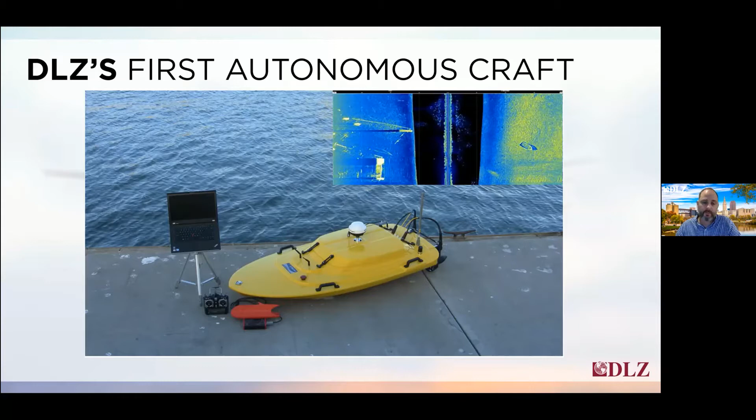So DLZ, when we first started looking in 2015 at this technology, we started looking at the capabilities, the intended use of what we would use unmanned aircraft for, the environment we would be using them, the cost, and the maintenance of the aircraft, either firmware updates or motors, batteries, this kind of thing to keep us operating drones safely.

It has the capability of swapping out different payloads, different sensors, that allows us to do aerial mapping, orthomosaics, thermal mapping, that kind of high-end detail and very accurate mapping, where the other two are quadcopters, also capable of doing 3D mapping. The difference being that the quadcopters' battery life is not as long because they're working harder.

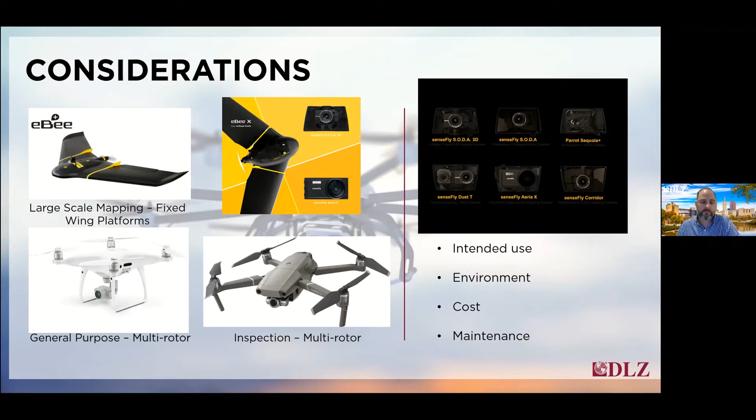The inspection multi-rotor that you see in the bottom right has the capability of zooming in. So if you have a very still day, this particular platform has a good gimbal, you're able to zoom into certain features from a far distance. So that one does have that advantage.

So DLZ has a total of 9 remote pilots that are certified by the FAA. We have 11 different drones that we're currently operating in 6 locations, and that gives us the capability to operate and cover just about all of DLZ's 27 locations and operating territories. And if for some reason we're not able to get there immediately, we do have the capability of throwing the small plane into the big plane and giving us an even more increased service territory.

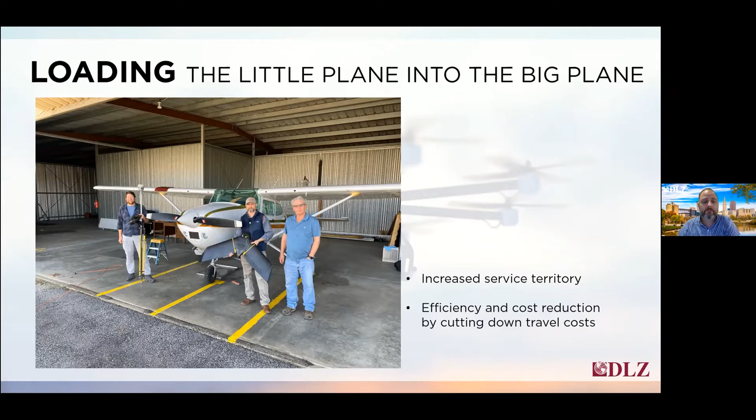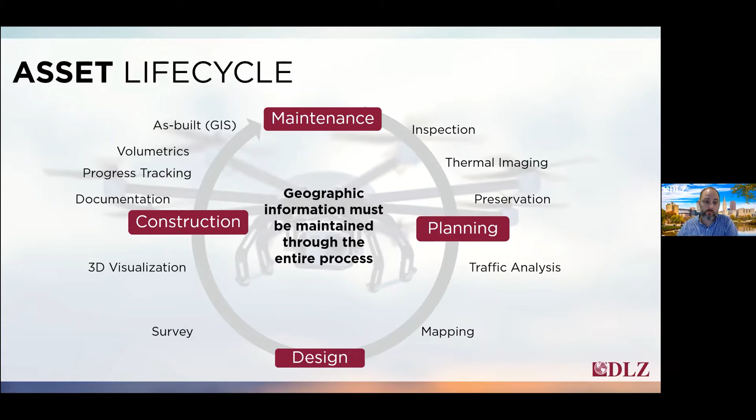So this is a really good slide that I like to share with folks to try to put in perspective from land surveying and mapping. And drones is just another tool that gets to touch this asset lifecycle.

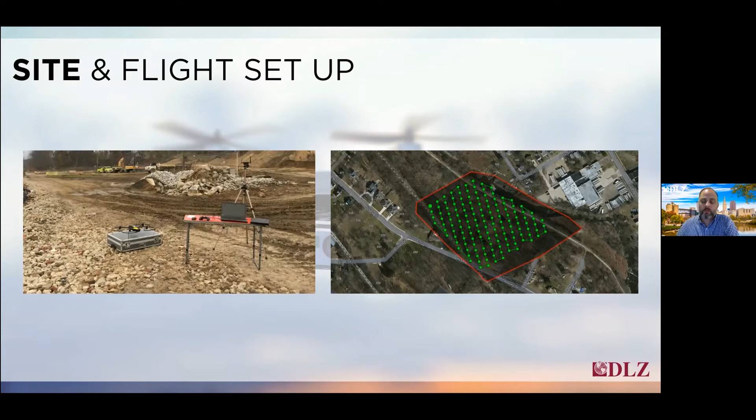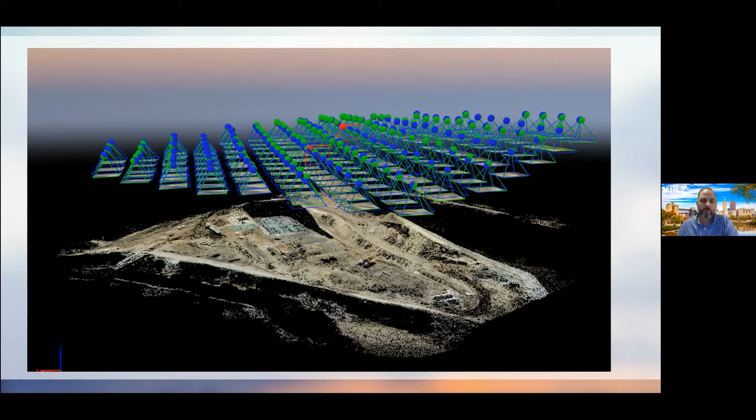The red ones that you see in this are actually points where there's bad data. Probably the drone was blown off course. So the software is sophisticated enough to understand that those particular points from those two images are not good enough for building the solution to our surface model.

So when we talk about mapping using drones, it's essentially no different than conventional aerial mapping. For folks that have used conventional aerial mapping over the years, we're basically doing the same thing with drones. The big difference is we have to fly 400 feet or less. So that means that the level of detail that we're getting is actually better in some cases compared to digital photogrammetry that you get from a helicopter or airplane conventionally.

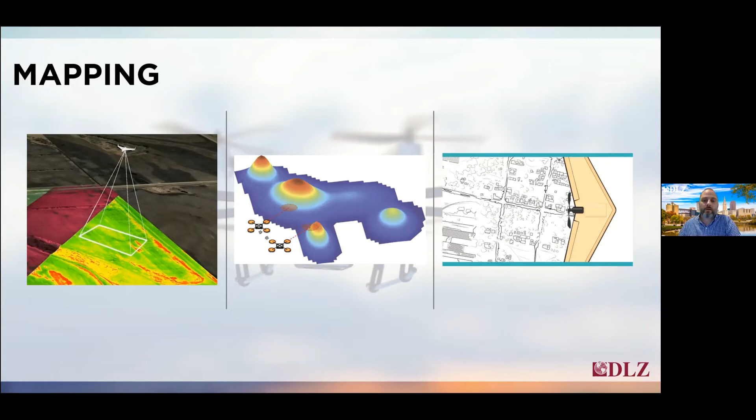And the software also generates a 10-page quality report showing the average of each one of the aerial targets and how we hit them. Basically, it comes down with an average. So you have 20 aerial targets set on a site, and it'll give you an average, or you can drill down and see what each one of those aerial targets transposed and what the software thought it should be versus what it came out to be. So we know that the quality of our mapping is accurate.

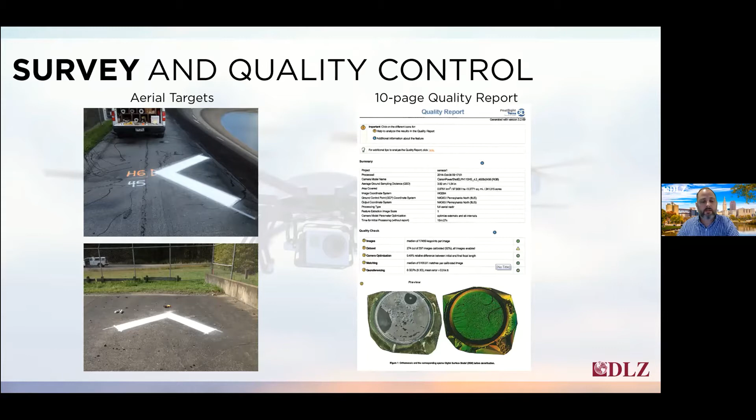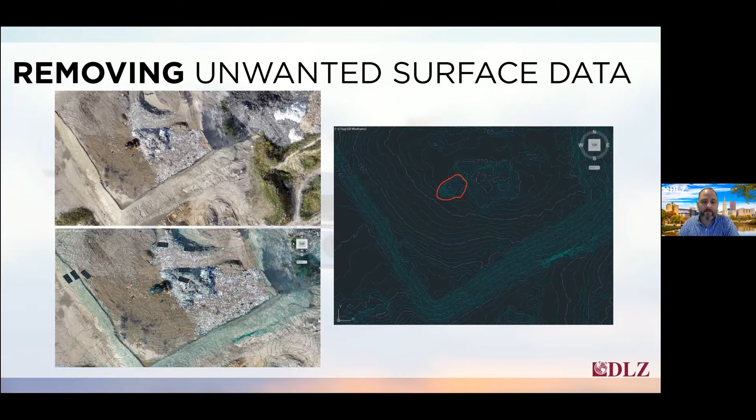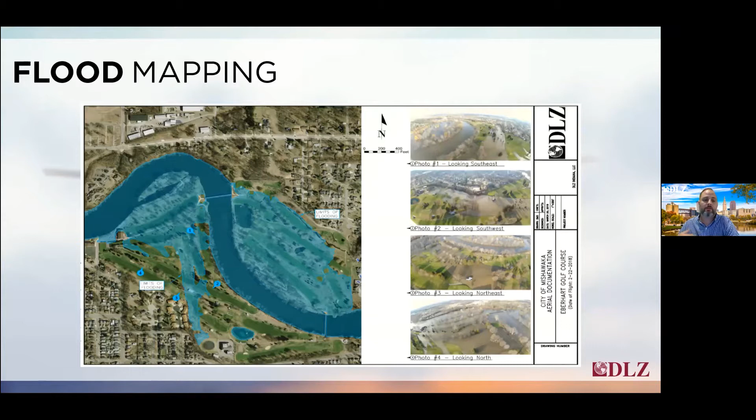Flood mapping is becoming a very popular use for drones. We get a lot of floods some times of the year in different parts of the country, 100-year up to 200-year flood frequencies. We could be called and dispatched out directly after a large flood and have been asked to do so. This particular example is out in Indiana, where we had a flood, and our folks were called out to immediately get good existing conditions, doing video, still imagery, and then data in the can to then build 3D models.

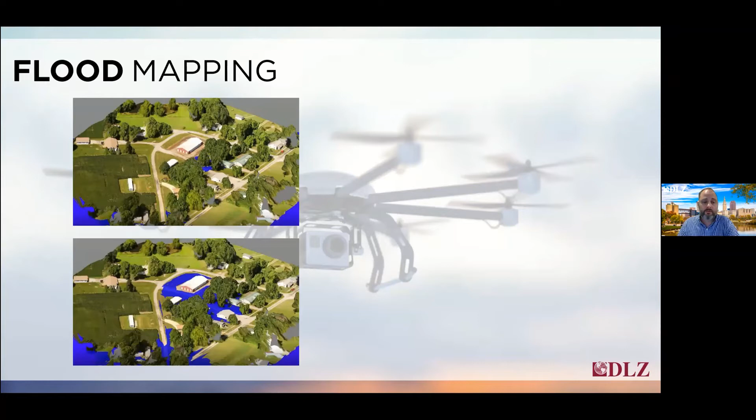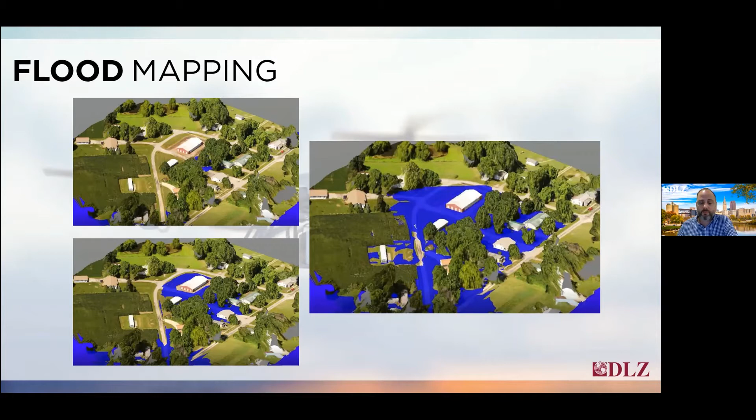And this is a major benefit when we start looking at what this means in the future. Should we get a 500-year frequency or something really large, or some sort of dam failure? We can then take that surface model data and raise the elevation of those potential floodwaters to see how they interact with structures and roadways.

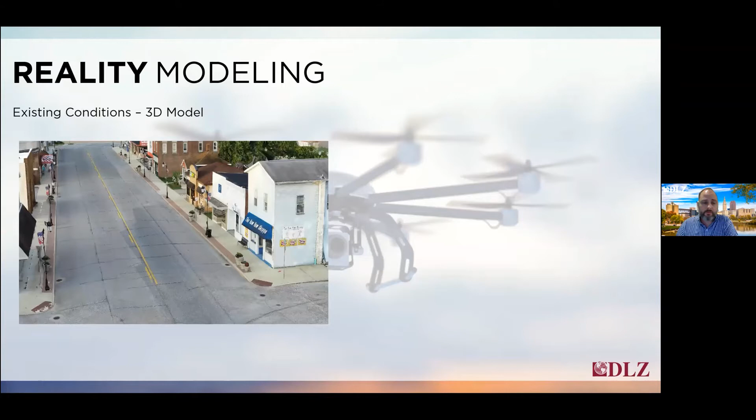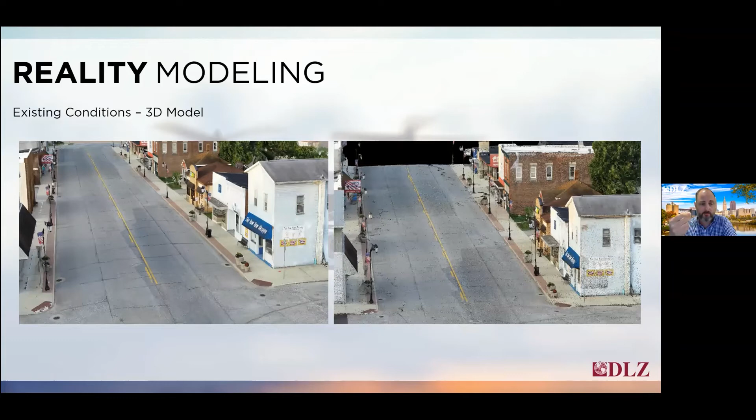Reality modeling: using this technology inside of our photogrammetry software, we're able to basically take the orthomosaic and drape it on top of the point cloud to build what's called a reality model, which allows end users to flip around in 3D space and be able to actually see and, I guess, interact with the data that we captured that day during the flight.

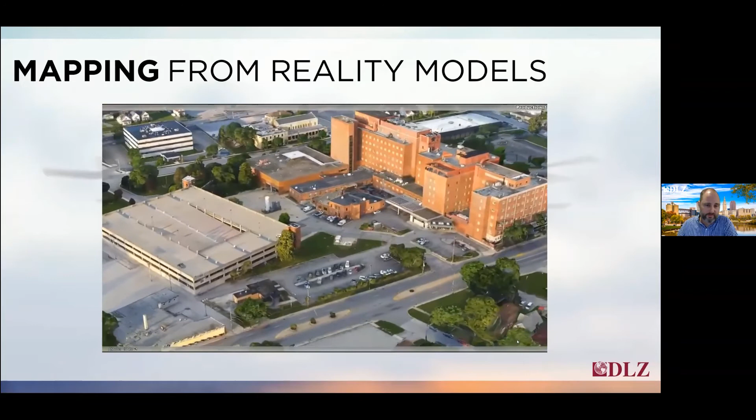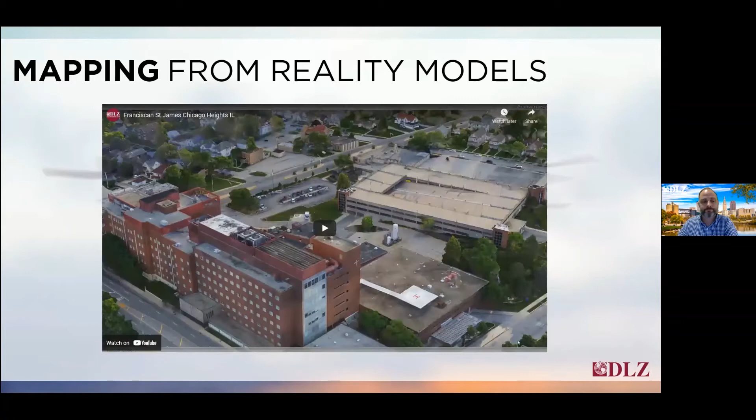And this particular example has been greatly enhanced, but again, it's an orthomosaic draped on top of a point cloud. So at any time we can stop this model, take measurements out of it, get elevations, and extract data, and even be able to create a survey grade base map, which is what we did for this project,

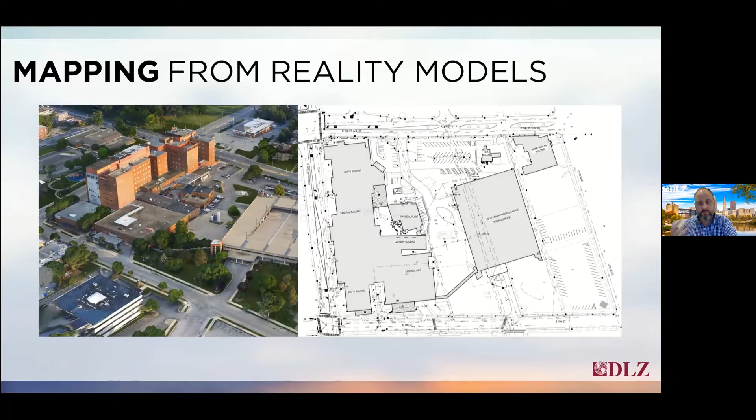being a hospital out in Indiana. So what you see on the left is the actual aerial mosaic, and on the right, obviously, is a CAD file of the existing conditions that have been built off of both conventional survey data and aerial mapping data.

So another example of reality modeling in a visualization world, 3D world, we're able to take existing conditions from one of our flights and then add in, in this case, a proposed bridge. So other end users, residents of this community, can see what that bridge is going to look like before it even gets into the construction stages, which is a great benefit for folks that maybe don't understand the way things get built when you're looking at 2D plans.

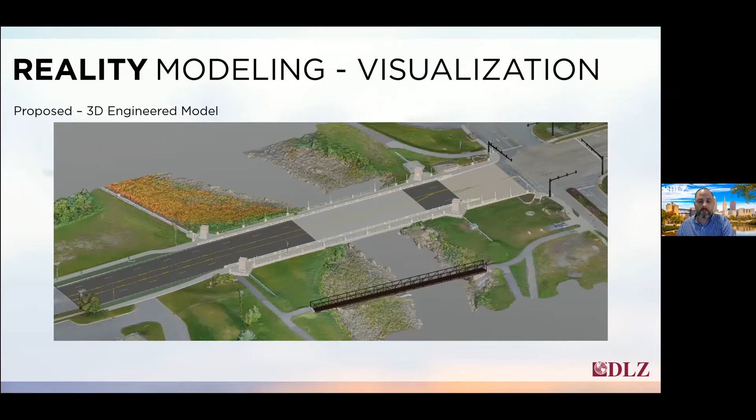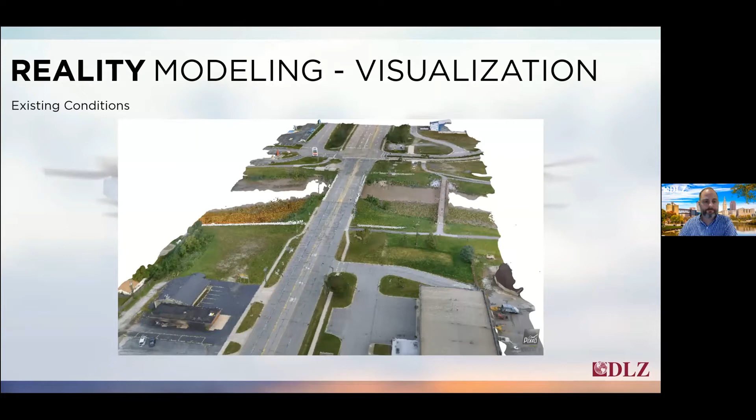Having this 3D model is a great benefit to explain a project and to get private ownership buy-ins also. So great tool. And this is just another visualization of it. This will actually play, but it'll slow it down. So I'm not going to play this one this time, but the next one I will.

So moving away from mapping and modeling, the inspection and visual documentation using drones is also another major benefit, when we're talking about asset infrastructure assessments, environmental monitoring, pipeline aerial inspection surveys, and tanks, bridges, towers. And the two big bullet points here that I'd like to point out are saving downtime and reducing occupational risk.

In the case of towers or bridges, you're still going to need to do those visual inspections. Structural engineers are still going to need to go out, do some soundings, but maybe before we actually go out and do the inspection, we get some good visual documentation of these assets and infrastructure.

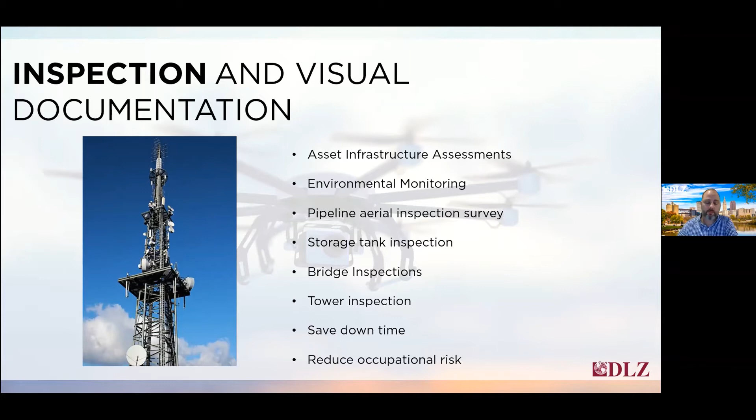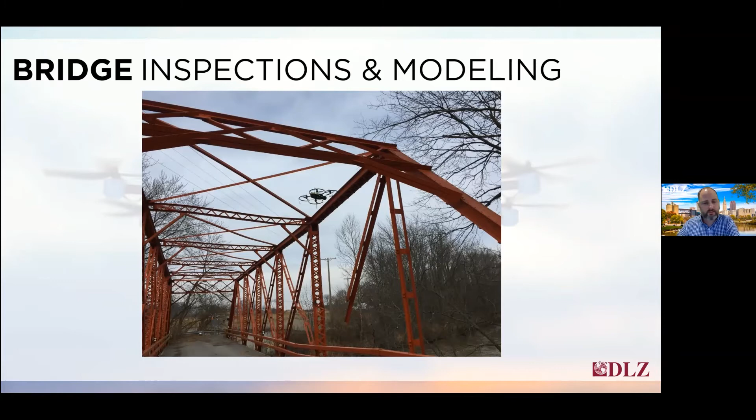So this is an example of one of our drones doing a bridge inspection. This particular bridge out in Indiana, we had a farmer accidentally hit some of the structural members of the bridge, and it was an unsafe bridge for any vehicle to get out on there, and we needed to get some up close shots of the connections where the damage was done before we sent anybody out to actually do the inspection to get a really good assessment. So just an example of what it looks like in the field.

Another bridge example I wanted to present on is the I-490 bridge in Cleveland. This particular bridge is a really good example of using multiple technologies, not just aerial mapping, but also 3D scanning below the bridge. The challenge of this bridge, before we even started, was it was in a controlled airspace, Burke Lakefront Airport, and we had to get a permit from the FAA to fly in this airspace.

And it's a particularly busy airspace from the standpoint of having Burke Lakefront Airport and 5 different heliports in the area, hospitals and the like. And also we had Cessna aircraft doing flyovers on gas transmission lines. So we had to have 2 FAA aviation radios. We had tower on speed dial, and we had multiple visual observers, VOs. So this cut down the risk and kept us flying safely.

There was one circumstance where we had to bring the aircraft down lower because of the Cessna that was doing some inspection work. But for the most case, as long as we were flying at that 400 feet or less, we're really not at any risk in this particular location. So getting that permit from the FAA really was not a problem for this particular project.

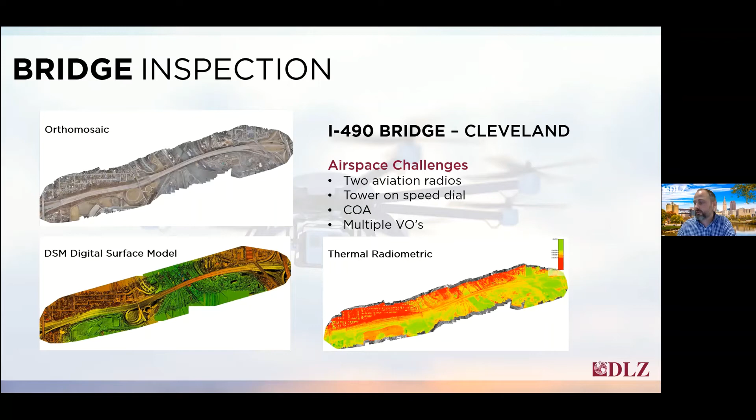So I guess I should back up one here. So what you're seeing here is the orthomosaic, DSM, or digital surface model, and the thermal radiometric. All 3 were taken in 2 flights with 1 sensor, and we finished this particular flight within about 2 hours.

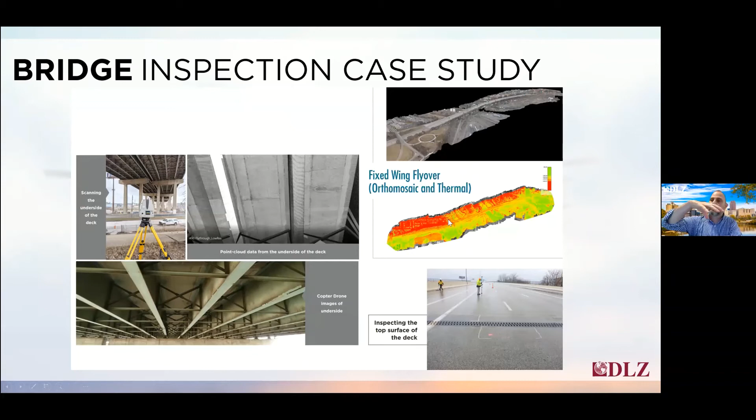And like I said, we were also asked to get good existing conditions below the bridge. So DLZ has in our arsenal a 3D scanner that you're seeing in this image here, and we were able to extract more points from the point cloud from the 3D scan, and both thermal and points from the aerial. So we have a top-down approach point cloud, and we have a point cloud below the bridge.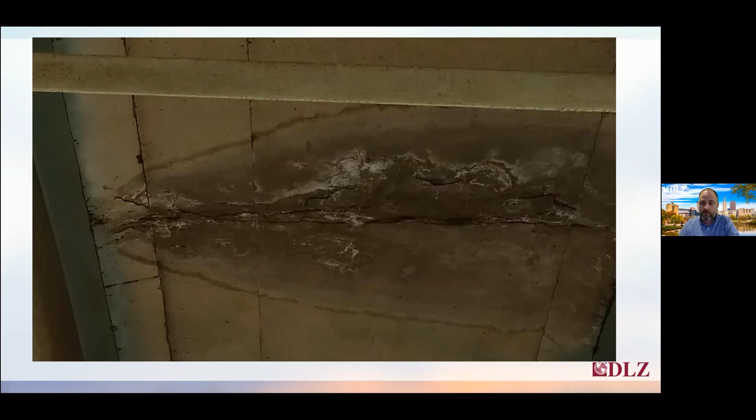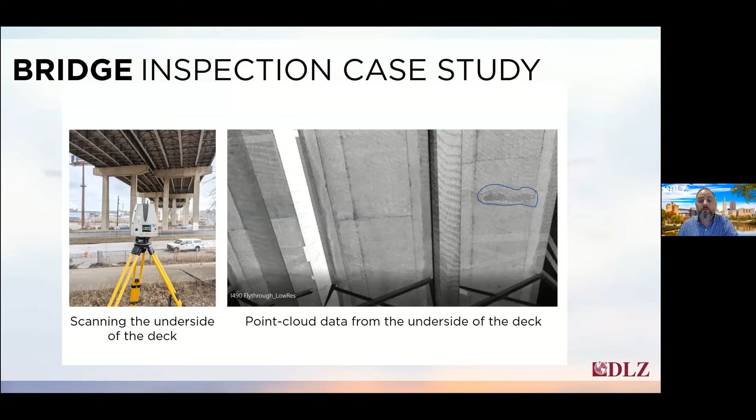That allows us to get really good existing conditions, map them, extract out figures of what you're seeing here, bridge spalls underneath the deck. And also here in this example, you can see highlighted in blue off to the right an image of a figure that we extracted from the point cloud.

And then during the inspection, physically stake on the top side of the bridge. So as we're doing our bridge inspection, dragging the chains, taking asphalt cores, our survey crew chief is locating those assets and then also staking out the below the structure items at the same time during the inspection. We're finding this to be of great value, and I think it's going to have its place in bridge inspections in the future for sure.

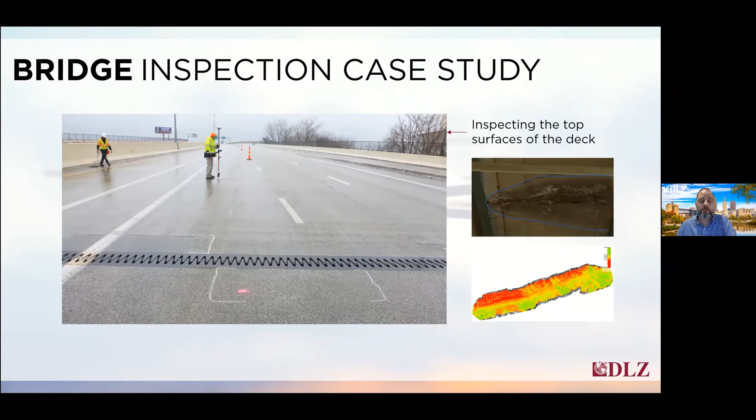The thermal is also kind of a case study where the idea is we think we're able to detect bridge delamination because of the temperature difference of a void in the pavement versus no void. So again, another top-down approach. When we're assessing bridges, we're starting to look at thermal as being another tool for helping us support decisions being made by our bridge department.

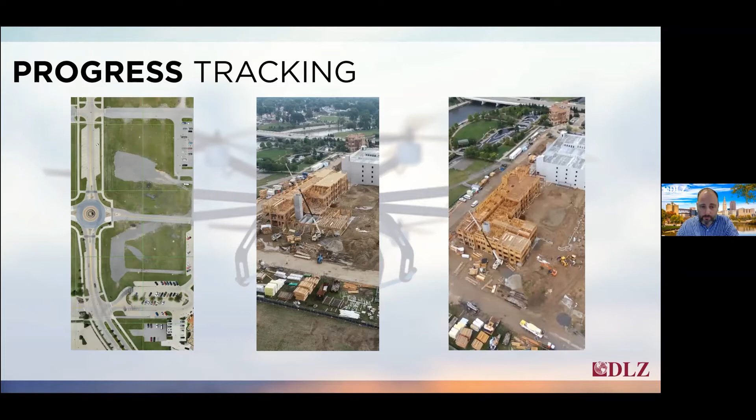Progress tracking, construction sites. So we have a raw land situation where we have a hospital being built in Indiana, and we wanted to get some aerial of the progress of this construction site and how this hospital is being built. Great tool for just that by itself, just looking visually at how this project evolves. But besides just getting the regular imagery, we're also taking the time to fly it autonomously and get good 3D data.

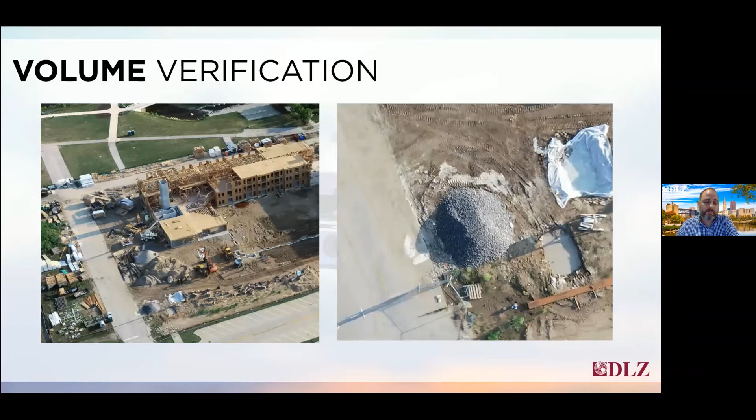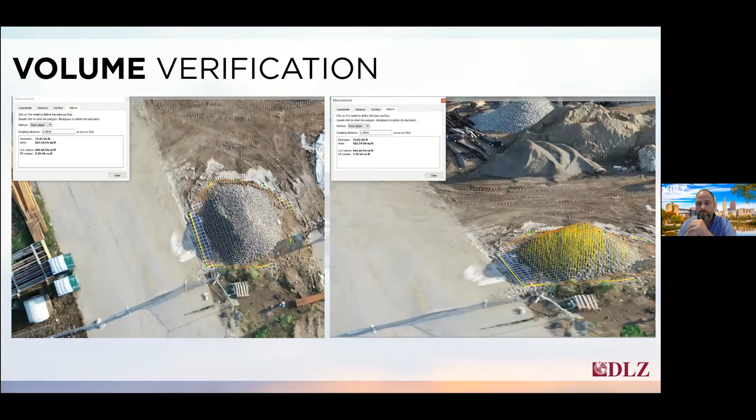So what you're seeing here is just a zoom in of a stockpile. And that stockpile, should we be asked after the project is built, we can provide a volumetric of that quantity from that day. So having just that data in the can can be a benefit should certain quantities or volumes need to come into question.

This is just another example of one of our industrial clients at a steel mill, where we're asked to get multiple volumetrics on multiple stockpiles, different quantities, different material types. Great tool for that. And it allows us to get away from the conventional aerial mapping approach, use drones, and we were able to reduce costs. And this allows some of our clients to maybe, instead of just annually, fly these sites semi-annually or quarterly to get more accurate quantities.

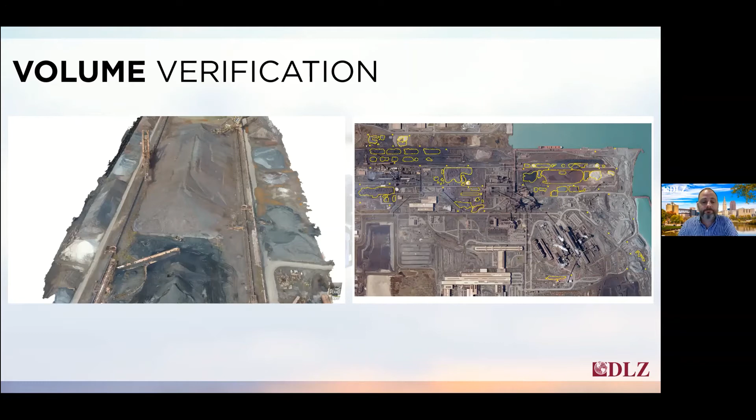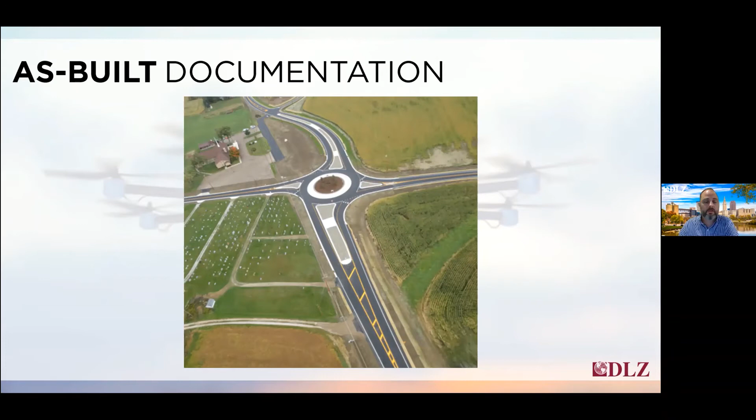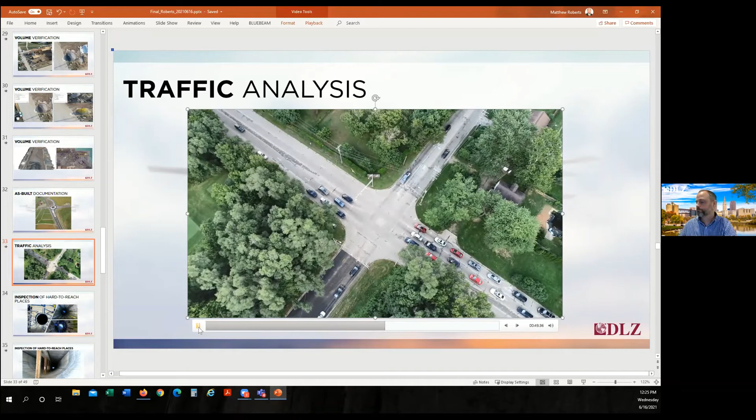The drone was able to hover for approximately 25-30 minutes and collect during peak rush hour all these automobiles, and if there's any question of the traffic count data, we're able to go back to the drone imagery now and isolate a key time when the traffic volume was at its highest or is in question based on our other data.

Inspection of hard to reach places. This particular example is of a shaft site in Columbus.

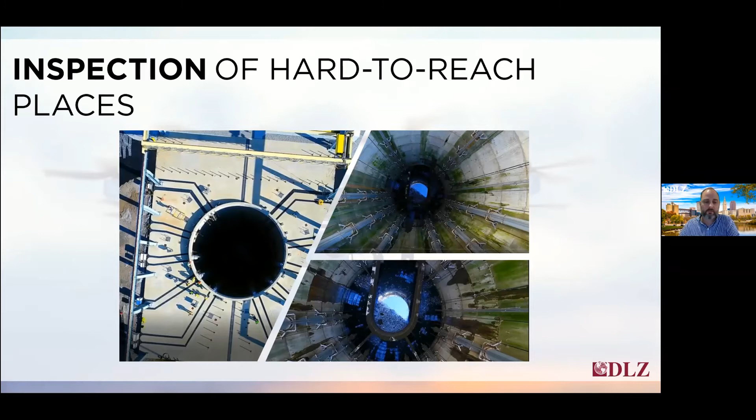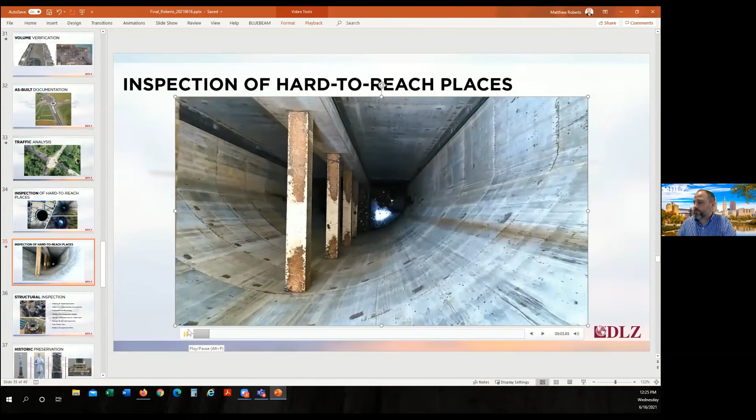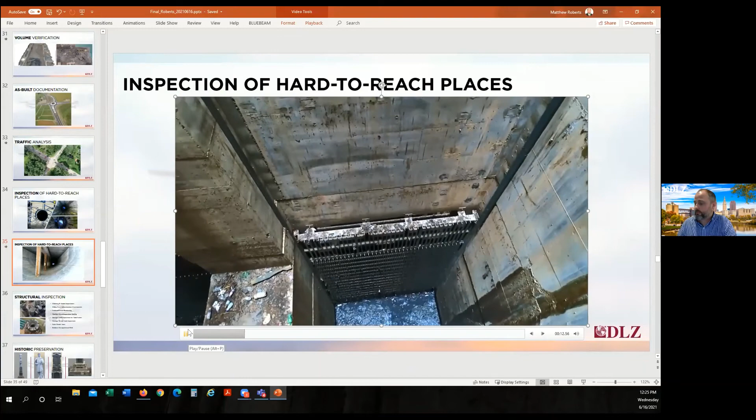This shaft leads down to a tunnel, and we're able to fly our drone off GPS, no longer having the telemetry software driving. This is a manual control kind of setup. Again, I'm going to get out just so I can share this. And we're able to take a video of this shaft and record its conditions. And while we're recording this video, we're also able to build a surface model from it.

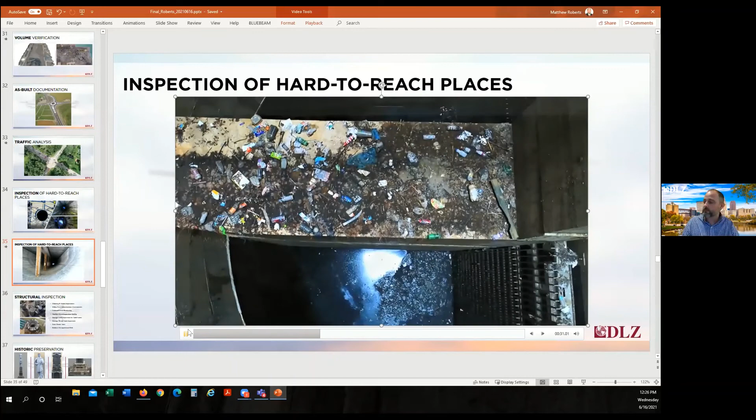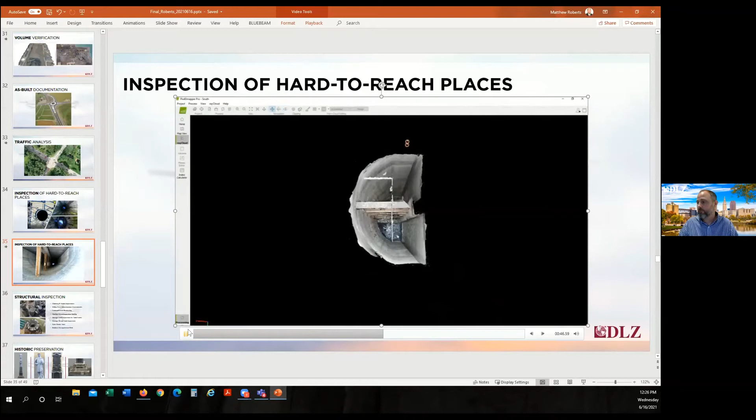So still imagery definitely is the more precise way of building 3D models from drone data. But in this particular case, we wanted to get in and out as quick as we could. So we took the video data, or the pixels from the video, and were still able to create this 3D model. Not as good as building a model from still imagery, but you're still able to get some good volumetric quantities, some good dimensioning, and isolate some elevations should that be of interest.

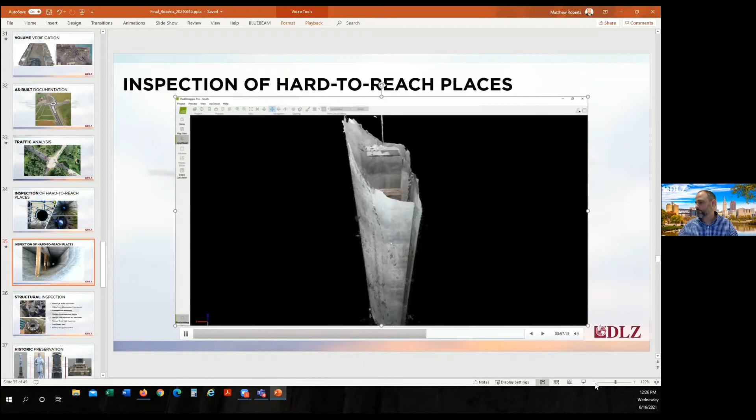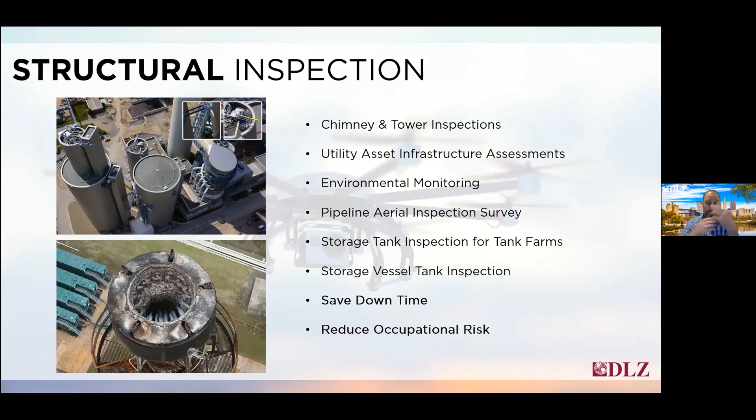Structural inspection goes without saying, just like bridges. We have the advantage of sending drones up now to look at connections, to look down chimneys, to look at the top of towers. The asset management, environmental monitoring. Again, we're saving downtime and reducing occupational risk. Before we put a guy on a boom truck or a man lift, maybe we should get some drone imagery first, so we know exactly where to put that boom truck, or where to put that man lift. Certain areas we might be able to ignore, and the areas we want to focus in on, again, saving time and money.

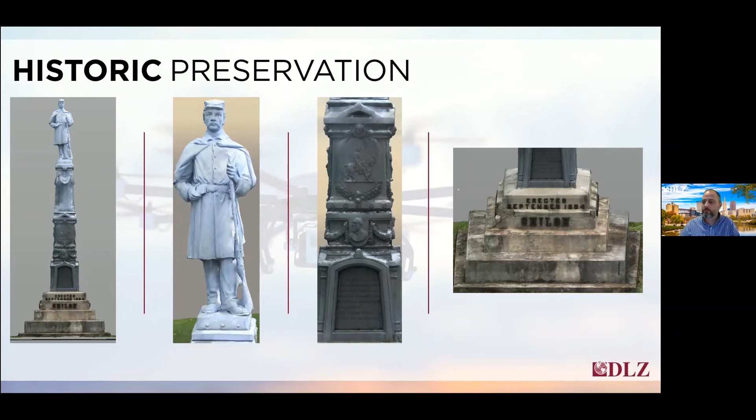Historic preservation. In this particular example, DLZ was asked to get good modeling and visualization of a monument that had to be relocated. And prior to the monument being taken down, we wanted to get a really good existing conditions model of it. So when it got erected at its new home site, we're able to make sure and verify that it was being erected back to its original state. So another great tool using either 3D scanning or aerial mapping.

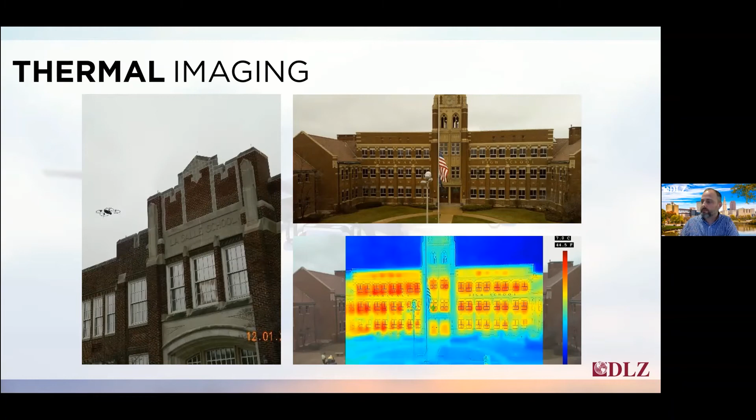Thermal imaging is becoming popular. Obviously there's handheld FLIR cameras. A lot of folks use those, and you can easily point a handheld FLIR camera, in this particular example at Mishawaka High School, getting heat loss and determining where the heat losses are, to detect the worst case scenarios of the building. The big difference, obviously, getting thermal mounted onto a drone, you're able to get the top-down approach and see the roof and the other higher areas that you would not be able to get with a handheld.

Another one becoming popular is mapping in thermal; the technical name is thermal radiometric mapping. And just like building our photogrammetry maps, the thermal is built the same way, where we're taking a bunch of thermal images and geospatially stitching them together. So good examples of using thermal mapping are tracking plumes, say in a situation where you have a river and there's some sort of discharge at a different temperature going into a river and going downstream, and we want to know how far and how long it takes to get into the river system. We're able to map that particular temperature difference now.

Or maybe at a lake, we have some sort of environmental contamination going on. You would expect that temperature to be different going into the waterway. So time and place is obviously a factor in getting this data, but it's now another tool, and again, helping us make good decisions on these particular situations.

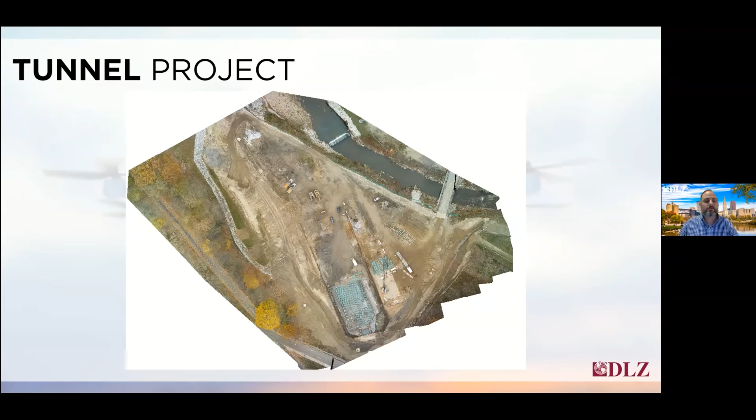Here's another example of a tunnel. This is actually a 27-foot diameter tunnel that DLZ designed. And this is the portal structure where the tunnel starts and goes horizontally into 6,000 feet of earth. And we were asked several times to go out and get good existing conditions of this site. So we now have a history of flying it 4 different times from start to near finish. And this is a great example of what it looked like during construction.

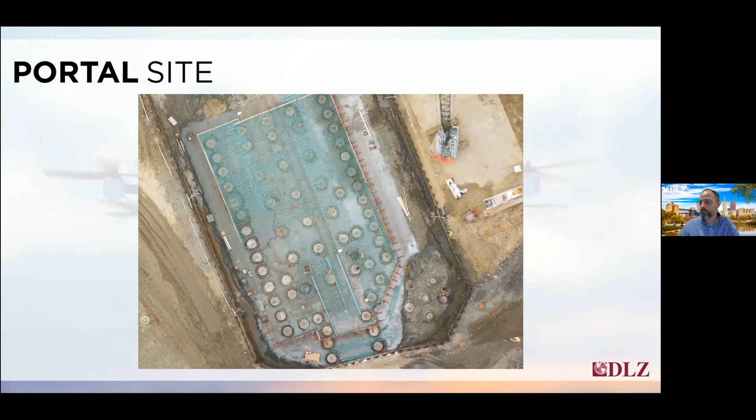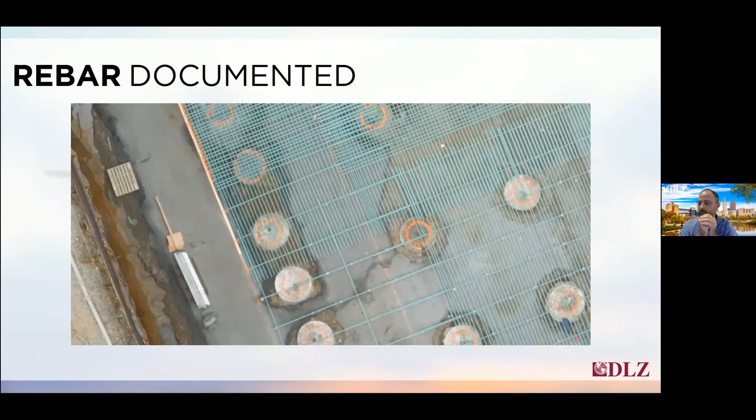In this particular image, we're seeing large number 11 rebar before they were permanently entombed in a large concrete mat. So now future generations not only have the imagery, but we're also able to build a model and get you a good location and elevation of these rebar and how they looked before concrete was poured.

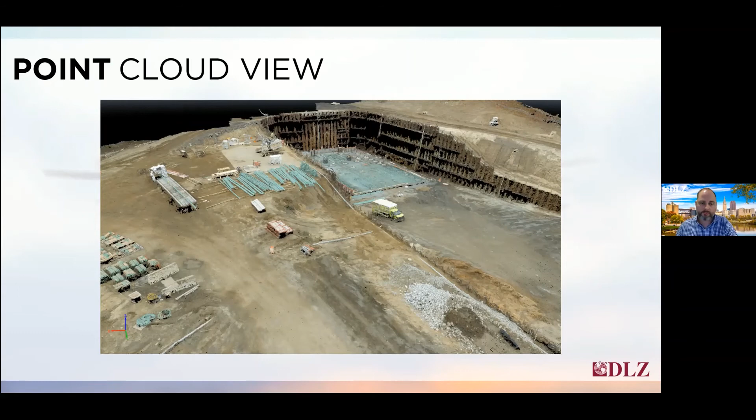This again is the crib wall and the portal structure flipped up in a space where we're able to create a video and share with other end users, so people can see how much we captured, the limits of what we captured, so we can better share what kind of models or 2D plans we can build from this information.

Another very valuable tool is live streaming. So we're able to capture with our quadcopters 4K footage and share it back through platforms like YouTube at a 1080p rate. So if we have folks in other offices, other design teams in other states that need to see what a site looks like, we can send a drone operator out on site, and certain people can ask the drone operator to move left, move right, pan left, pan right.

And this is becoming a great tool for folks that are just starting to want to understand the conceptual plan for a project and get a good idea of the existing conditions well before any surveying or design gets started.

So we should talk about limitations. We're never going to get rid of boots on the ground. I want to stress that field surveying is still always going to be a big part of what we do. We're always going to have brush lines, tree covers that are going to get in the way of getting good aerial mapping data. It's always been a problem with conventional aerial mapping, and it's still going to be a problem with using drones. So we still have to send our field folks out to get these areas.

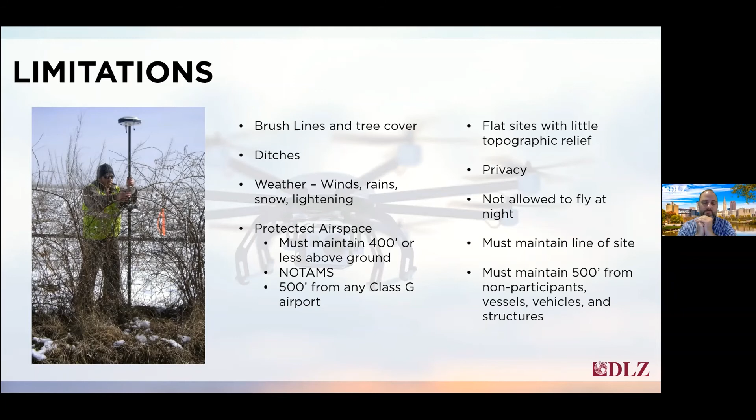We're not allowed to fly at night currently, but you can get a certificate of authorization from the FAA to do so. We must maintain line of sight and be within 2 nautical miles of the operator. So this means that if you have to maintain line of sight, you might have to get more than one visual observer, especially if you're flying large corridors and your operator's in the middle of 2 nautical miles and 2 nautical miles. You're likely going to need more visual observers along that corridor.

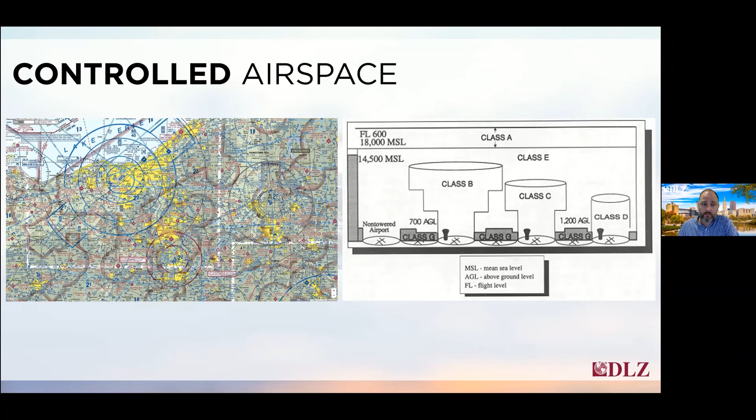So solutions to some of these limitations: knowing when conventional surveying data is needed well before you provide a scope to fly, having contingency plans, filing your Part 107 waivers, which is the permit I just spoke of. If publishing data, then getting property owner authorization and talking to legal folks about that. And keep your schedule open, allowing for the best weather windows. We typically like to pick one week and pick the day within that week that makes the most sense.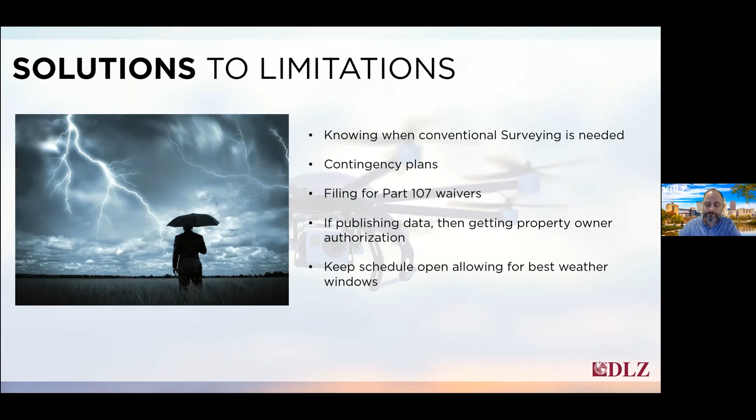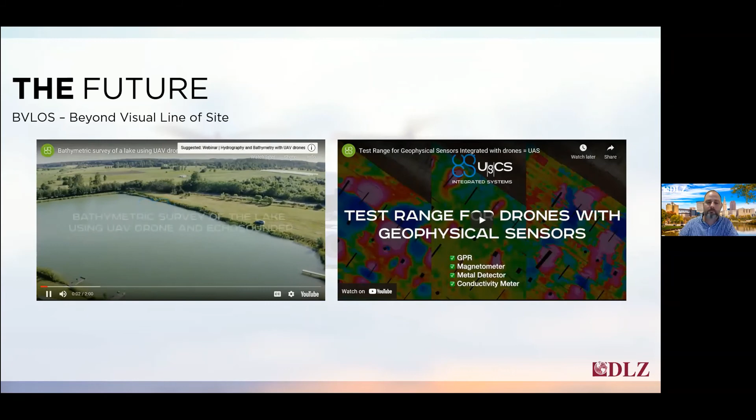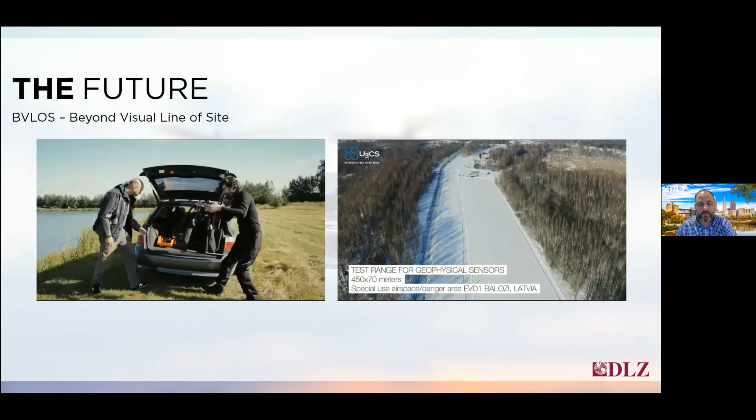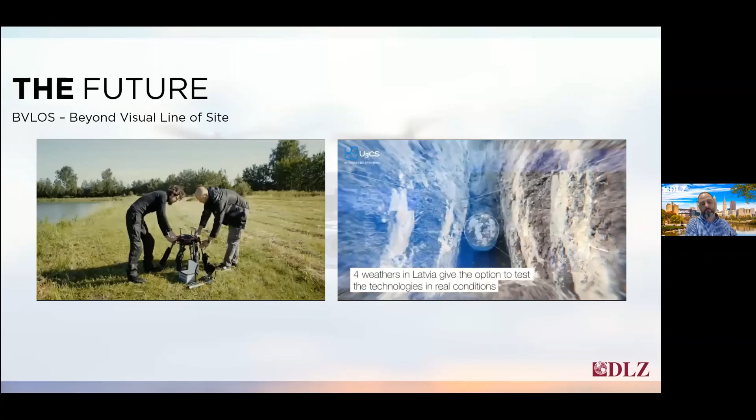So moving forward, the future of drones: we're seeing and tracking different payloads that are now starting to be added to drones. This particular video that you see on the left is of a drone that's going to drop a sonar and do hydrographic modeling and fly over a lake to get contours below the surface, kind of like what we do with our Z boat and conventional hydrographic boats here at DLZ. Just the level of accuracy isn't there yet. So our preferred method is still going to be the Z boat or a conventional boat. But it's a good technology that we're tracking, and we can't wait for it to be more accurate.

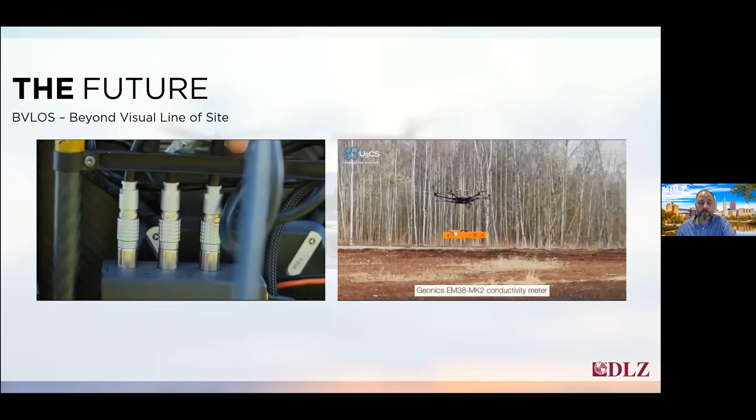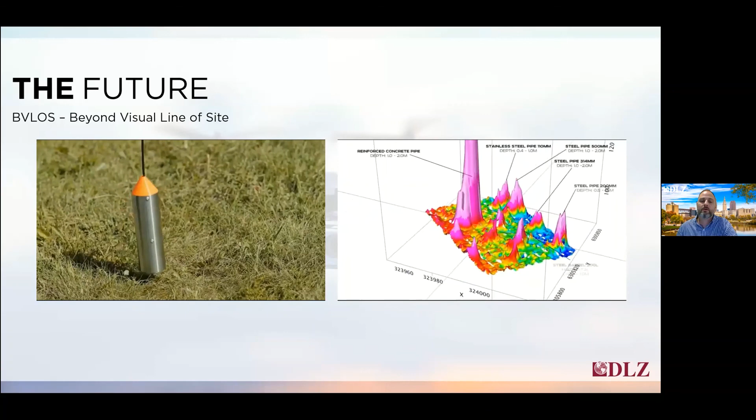The video on the right is magnetometers, ground penetrating radars, and also they have different antennas for detecting gas leaks. Again, the payloads have to be light enough for our drones, which kind of limits the level of accuracy that you can get. But you can see where we're going with this future, and we're really excited to see drones being used with these kinds of techniques.